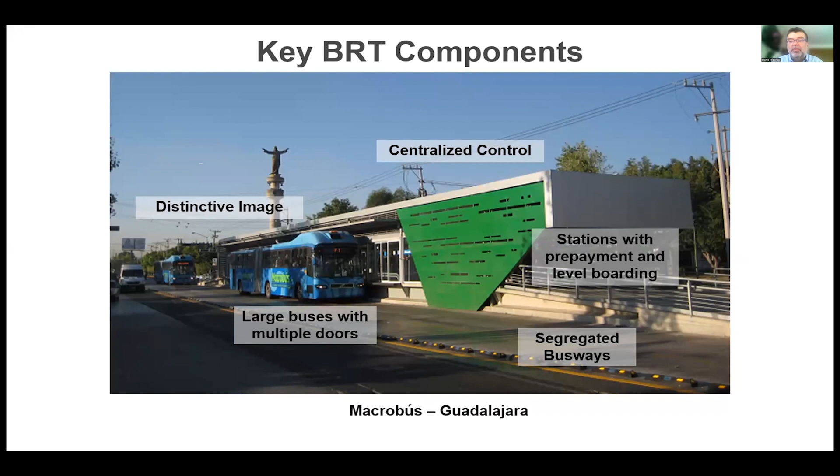Buses that are adequate to the capacity and the need of the system, stations. In most of the high capacity systems, you pay before boarding the buses, not in the bus, to reduce the dwell time, the time that the bus is at the station. Centralized control, that's very, very important to optimize the operation, and a distinctive image. When you have all these elements together, you have a full BRT, but you have a lot of flexibility to apply these concepts to different corridors in different parts of the world.

Currently, there are 187 cities moving more than 30 million passengers every day, almost 6,000 kilometers of BRT, and it is mostly concentrated in Latin America, where the systems started in the city of Curitiba. And we have examples in Asia, particularly in China, and in Australia. There are very important systems in Australia, but there are also systems in Europe and the US, which are part of the fabric of the cities and the integrated systems we need.

And actually, this was not part of mobility 25, 30 years ago. There were few bus corridors, one in France, then one in Lima, then Curitiba in southern Brazil, but there were very few systems as such in different parts of the world. And as with any technology, there was a slow and long time where the technology was not adopted by many cities. And suddenly, after Mayor Enrique Peñalosa put together the system in Bogota, many people got interested in this as part of mobility.

And there was a fast adoption, very, very fast adoption starting in 2001 up to 2014. And then there was a decline, not a decline, still several cities are adopting BRT, but not as fast as they did in the first decade of this millennium. And when I see this picture, I see something very similar that happened in the previous change of the century, and that was the adoption of trams. The adoption of trams got exactly the same shape.

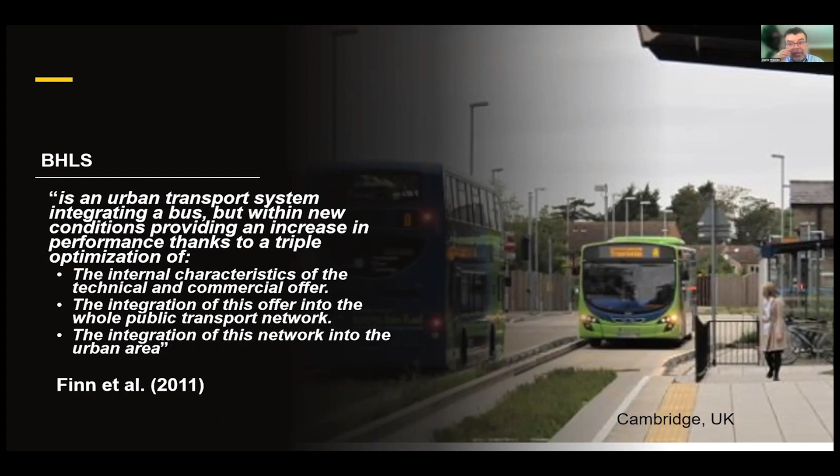These concepts were applied in many cities in Europe in the form of BHLS, and you see that in the end, the concept of BHLS is a very close cousin of the North American BRT, because the term BRT was coined in the US and then applied in many places of the world for systems that were already in place. Curitiba and Bogota were already in place when the term BRT came into massive use. But when you see Europe, the busway in Nantes, you see running ways, you see stations, you see vehicles, you see ITS and operation management tools, and a strong identity.

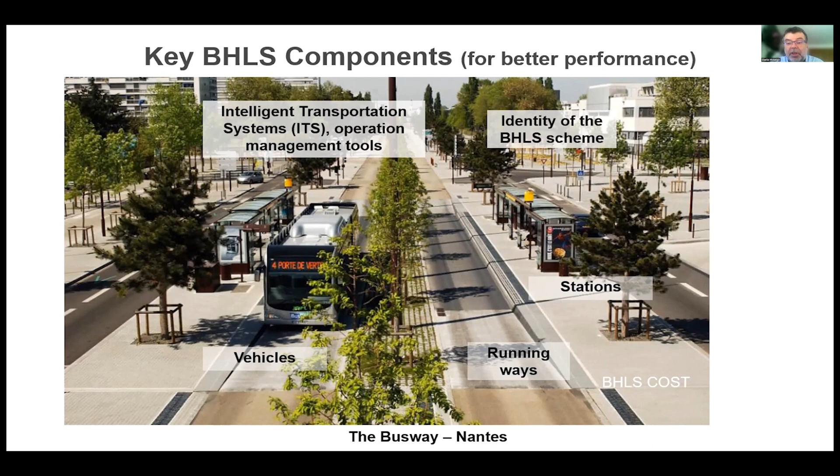So the BHLS is a very strong cousin, it's a very close cousin to BRT, but it's very adaptive and is focusing on performance and integration, which are two very good elements. And the report by Finn et al. and other reports have considered BRT innovative concepts that can be a part of the transportation system and also the backbone of public transport in medium and small cities. Probably big cities need heavy rail, but BRT and BHLS can be part of the overall transportation system, and in some cities will be the backbone of the system.

So there are many reports. Here are some of the ones that I picked up over these 25 years that I have been working on the topic. And the characteristics that are behind these many studies are better access to low-income communities, reductions in emissions, land value increases, which is a very important concept on how to improve cities, to increase the value of the land. If you protect against gentrification, it's okay, but many reports show that BRT can also increase land values and improve road safety, which is also a critical element in our cities.

So there's a very strong literature supporting BRT and BHLS. There are issues in implementation, there are debates and discussions, but it's part of the toolbox. The difficulties are always not on the technology itself, but on institutions, on finances, but also the misperception that buses are a low quality mode, which is wrong. Buses can be high quality if you design well, if you operate well, and if you provide the right characteristics of the system. And even though many reviews, some of which I have participated in actively, show that there have been planning, implementation, and operational issues, all of these issues are solvable, things that you can fix, not things that are impossible to face.

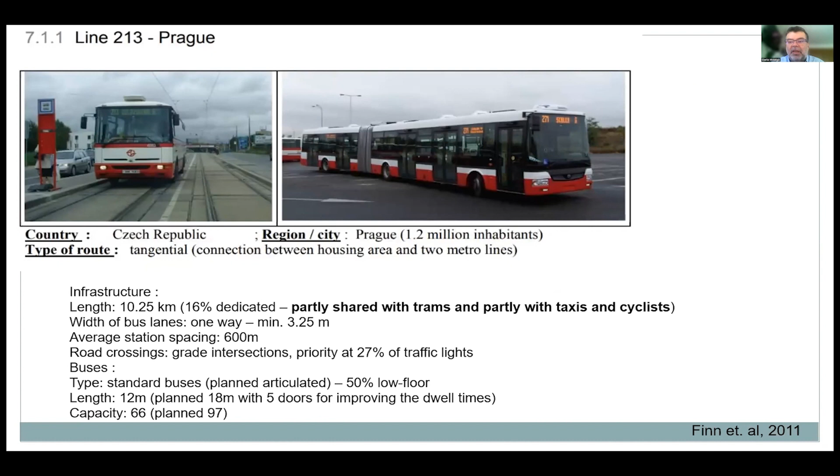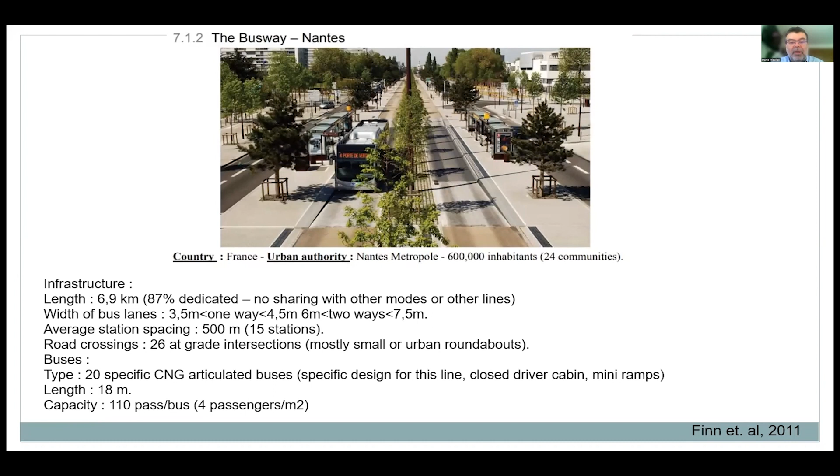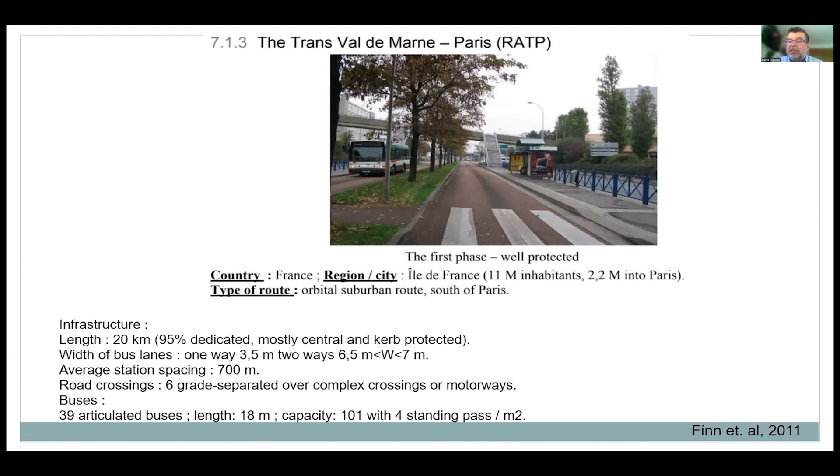The Nantes example is a very interesting corridor, not that long, it's only 6.9 kilometers, and it's very high capacity and has a very good integration to the urban realm. I really like this project. In Paris, there is a peripheral route that goes around Paris with buses that also help not getting the people in and out, because the buses come from other places, enter the busway, and continue at higher speed because they are away from traffic in Paris, which is a very excellent city with many things going on.

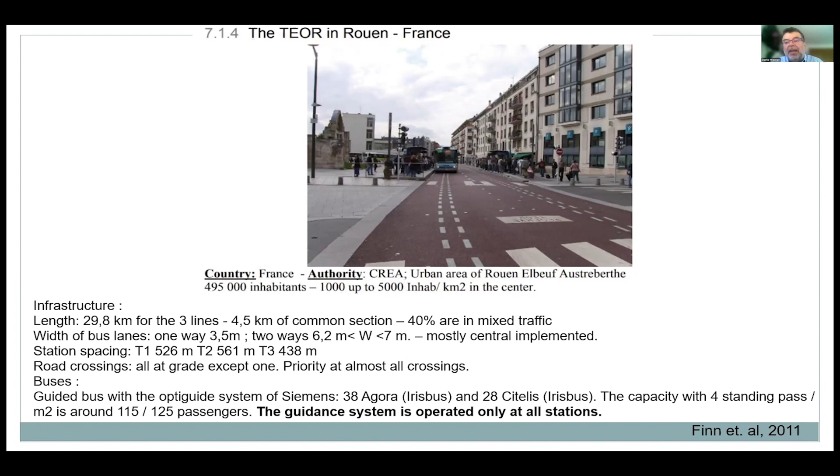There's another one in France, in Rouen. This one has guided buses that go really close to the station, so there is not a gap, and the guiding system works specifically at the stations, not all the way along the corridor. But the future of buses is automated buses. It's easier to automate a bus in a busway than automate a car in general traffic. So automation is coming also to these elements of BHLS and BRT.

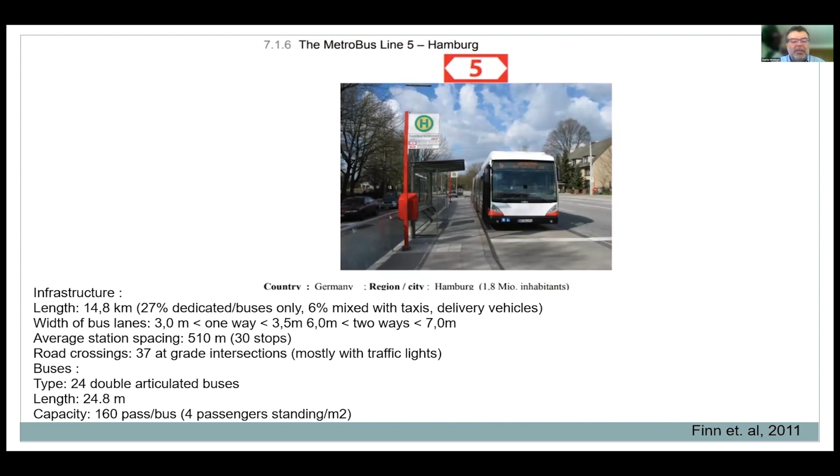This one in Lorient is very interesting because it doesn't have traffic lights and has a very special design. So the bus has priority without traffic lights, and it's faster for everybody in this place. In Hamburg, in Germany, you also see these elements, and you don't see a very special and spectacular design. It's actually simple. It's providing priority to the people that are going in the buses above the general traffic. Another example in Oberhausen, which has the combination of trams and buses. In Europe, they are not afraid of doing this combination.

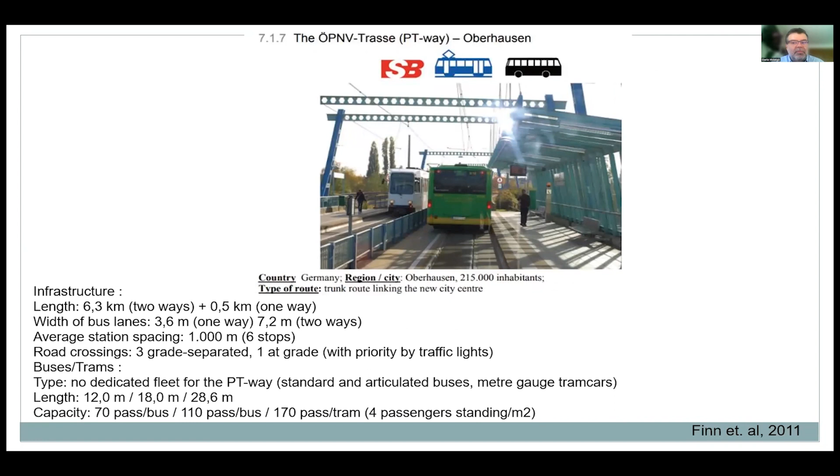There's no reason not to do it. And this one, there is a guided bus. This was an invention of the 70s in Essen. It was also applied in Adelaide in Australia and in Cambridge in the UK, having a little wheel on the lateral side of the bus that guides the bus at high speed in a totally dedicated lane, which is also grassy with greenery, and provides very high capacity and very fast commute to the users of this Spurbus in Essen.

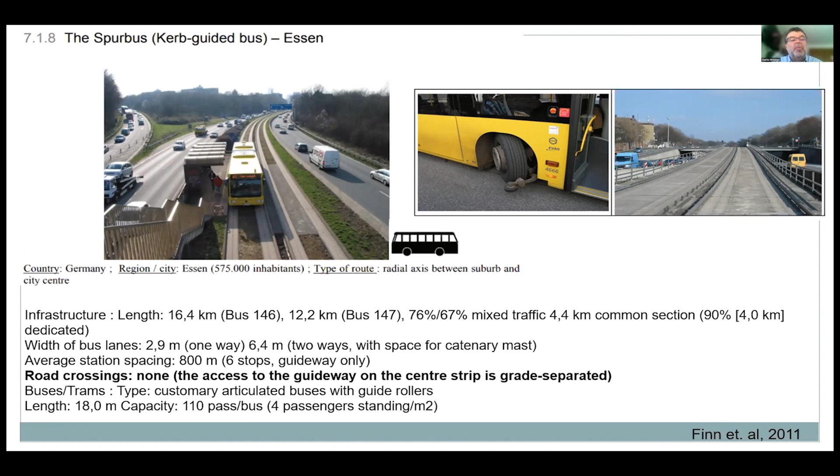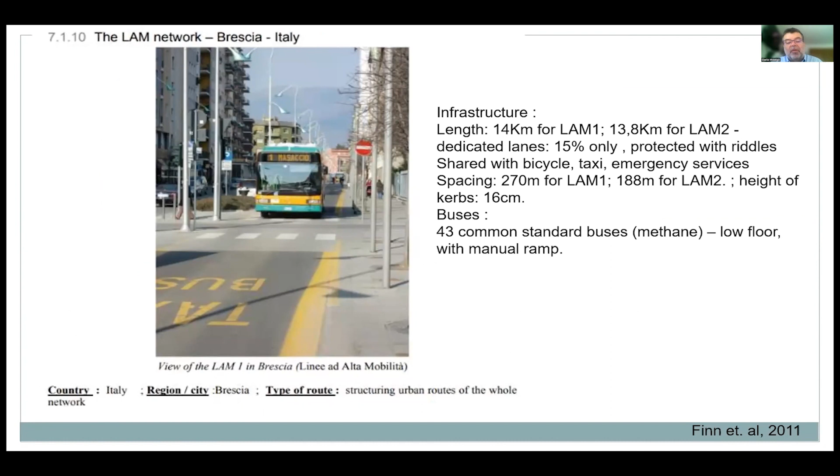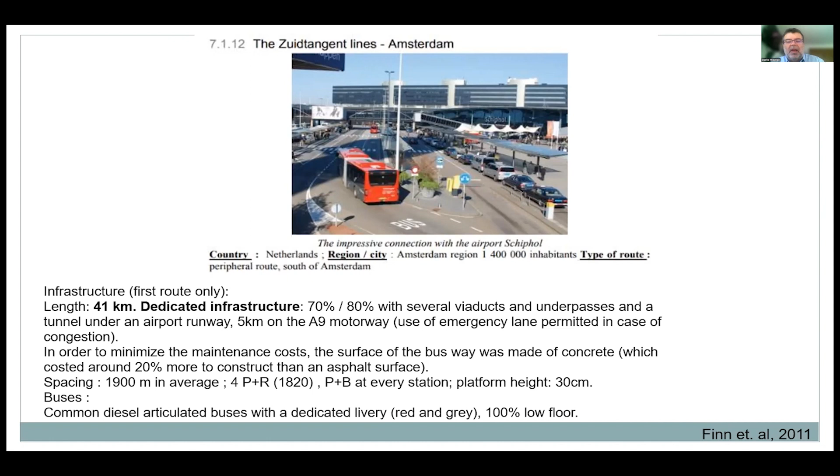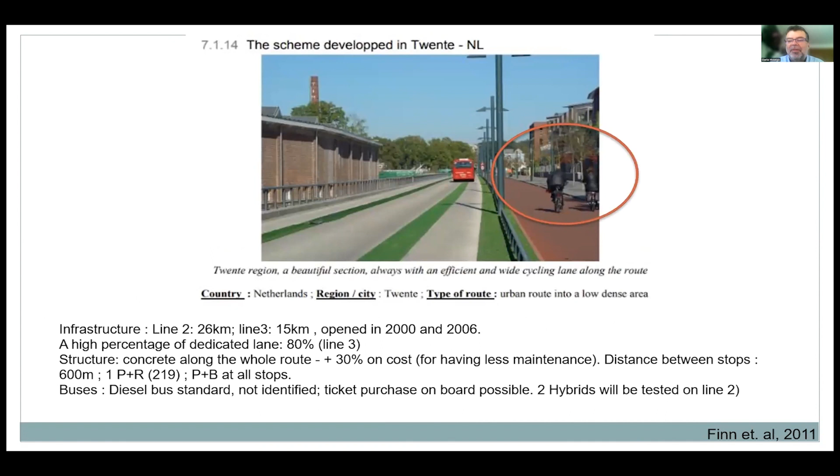There's also these buses in Brescia in Italy, which are also very, very interesting for the size of the city. And in Amsterdam, they had a really, really strong and connected network that goes all the way from the airport to many places in the city, 41 kilometers in a major European city. And there are other examples in the Netherlands, which always are combined with bicycles, because that's the Netherlands. You don't do just buses or trams, you also do bicycles.

And also in Lisbon, you see this in Spain with a guided trolley bus. You see in Gothenburg in Sweden, and also in Stockholm. And you also see in Zurich this very, very large bus that was designed especially for a BHLS route in Zurich. And in the UK, you see this Thameside, which is a new development that was developed also with the BHLS in place, and also the guided system in Cambridge. So these are examples from Europe, and you see a lot of flexibility.

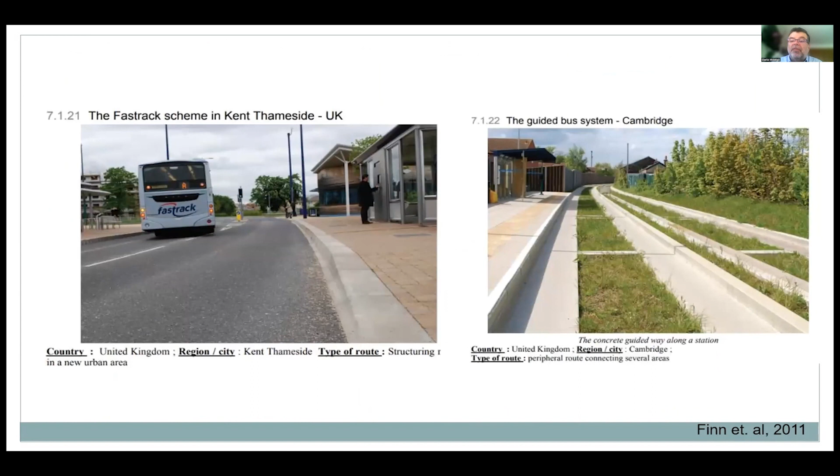But what about the US and Canada? In the US and Canada, there are 15 cities in the US, and the largest of them is New York City, with the Select Bus Service. Here in this series, Janette Sadik-Khan, who was the person behind all the transformation with Mayor Bloomberg in New York City. And in Canada, you have many systems that are really high usage. You have Ottawa, you have Winnipeg, and others that are lower capacity. Total of 7 cities listed in this database of BRT data that is maintained by WRI in Brazil.

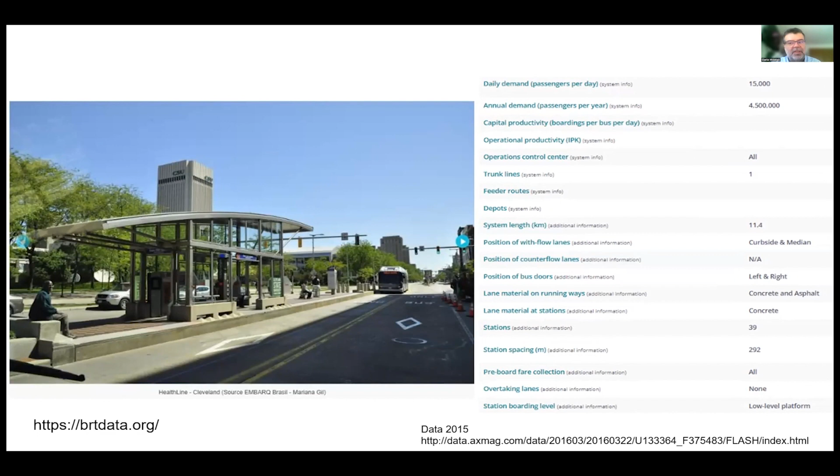So let's look at these examples. This is Albuquerque in New Mexico. It's a very interesting branding for it. It is called ART, A-R-T, which resonates very well. You have this one in Arlington, Virginia, close to Washington, D.C. It's a small route, but it's a very interesting integration into this part of the Washington, D.C. area. You have this Cleveland HealthLine. It's called HealthLine because there are many hospitals on the route. It's very high capacity for U.S. standards. It's a very nice system in Ohio.

And a system that is older is Eugene, Oregon. You see also this grassy route. You don't need to pave all the busway. You only need to pave where the wheels of the bus go, and you have very nice stations and shelters for Eugene, Oregon. It's a small city. There is another one in Fort Collins, Colorado, which uses the spare space along a rail track, but adapted very well for these buses that are called MAX.

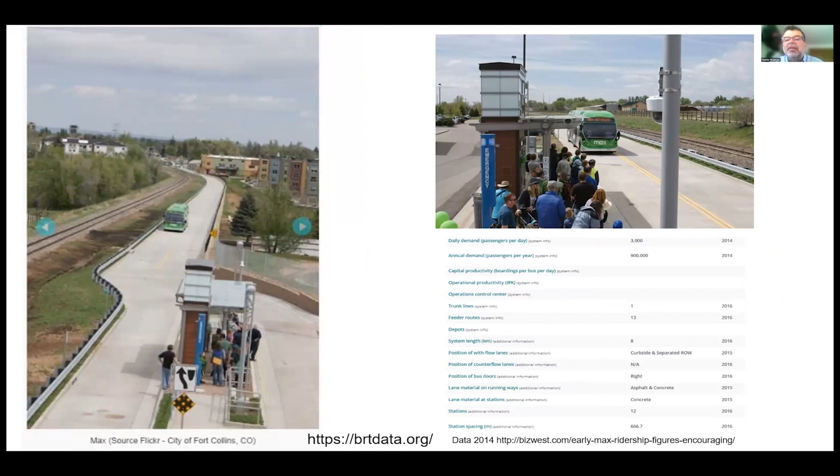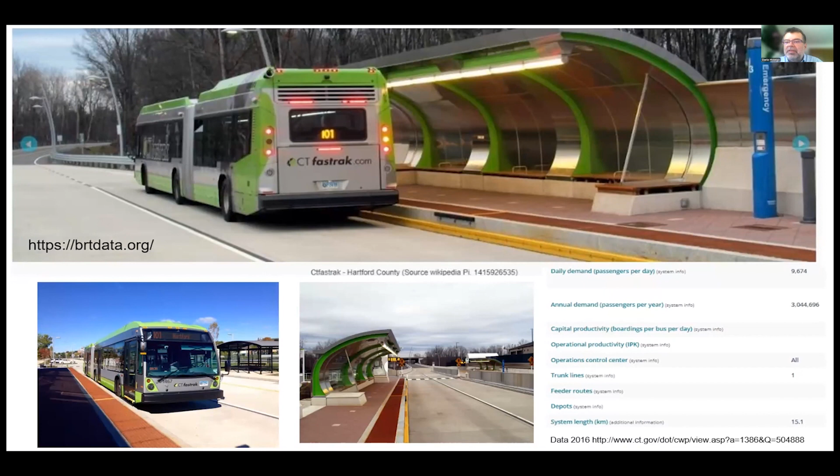And CTfastrak in Hartford County in Connecticut. Also the busways and the buses and all the characteristics in a combined system that provides higher capacity. In Vegas, where you can find anything, you can find also this BRT, which is a very, very well done system that even connects the mall with the older casinos, and it's not only used by locals, but also by many tourists in this city.

In Los Angeles, in California, they introduced these BRT routes, and it's actually an extended system for many corridors in LA, which has this adaptation of putting the bicycle in front of the bus, which is also a good way to combine long trips, combine your bike trip with a bus trip.

You have this Metrorail in Miami, also along a rail corridor. Some people in Miami say it doesn't work well and want to invest 10 times as much in something that will do mostly the same as the Metrorail is doing in Miami-Dade. A very, very extended system, very simple because it's just painted, red painted.

Hello, Dario, you just froze for a second. Hello, let's see if we get Dario back. Wow, this is very, very interesting. Dario, you are back. But you are muted. You hear me? Yeah, perfect. Thank you.

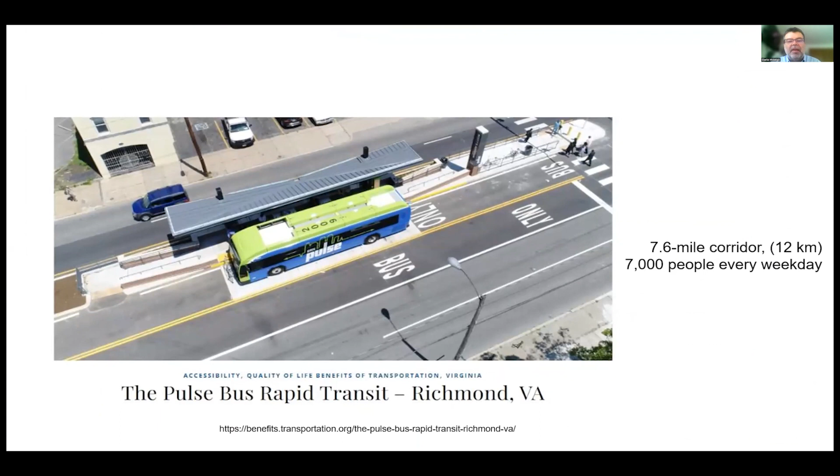An older system in the US is this one in Pittsburgh. It was one of the first implementations in North America. It is very high capacity and it's totally segregated. It doesn't cross with traffic. It's totally segregated, very similarly to the Transitway system in Ottawa. Also, this one in Richmond, Virginia, and this one in the city of San Bernardino.

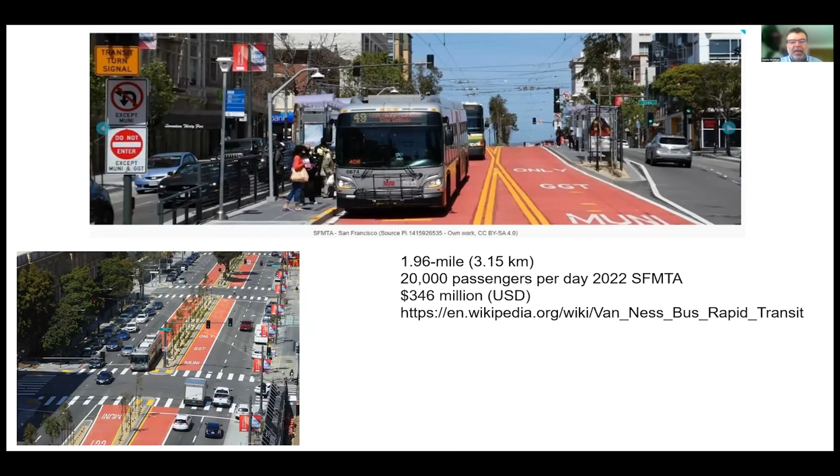And the last of the list is San Francisco in California. This is one of the two corridors in San Francisco. This is the Van Ness corridor. And now they have Market Street, which combines electric buses with normal buses. So you see that North America has been adapting these conditions of BHLS from Europe and BRT from Latin America.

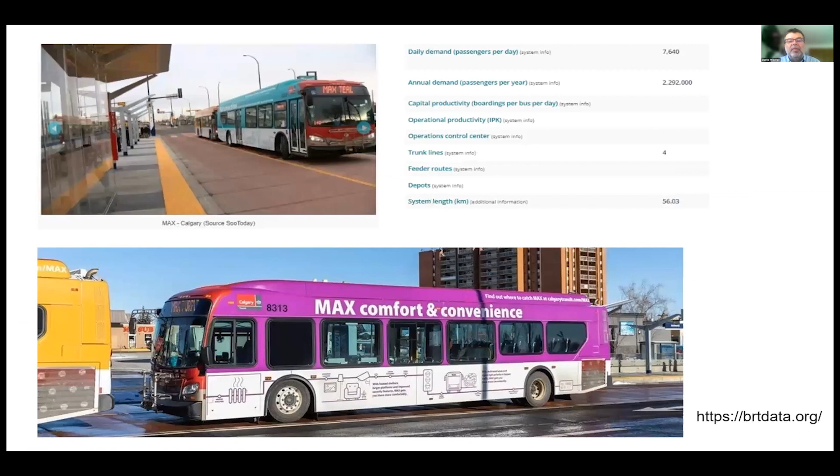And in Canada, you have 7 good examples that can be improved. Everything can be improved. The largest system is Ottawa, the Transitway, but you have this one in Calgary, MAX. You have this one in Gatineau. I didn't find the demand numbers, probably because it's in French. I didn't find the figures. Probably someone in the audience can provide us with numbers for Gatineau, which has a very particular way of design.

These systems in Canada are similar to the one in Adelaide in Australia. Probably the same group of people is designing them. They have these larger stations with good connections. This one is in Mississauga, and this one is in the Toronto area, and in Quebec is a larger system. Actually, it has been expanded over the whole city, and probably this one in Winnipeg, which is very short but very high usage.

Actually, the one in Winnipeg, and the audience can help us, it's buses that come from many places and then join and go in the busway. So it's very, very high usage, more than 166,000 passengers every day. And the one that I reported at the beginning of my talk, the one in York, which is very well done, and it's integrated with the fast, rapid development of this region in the metropolitan area of Toronto.

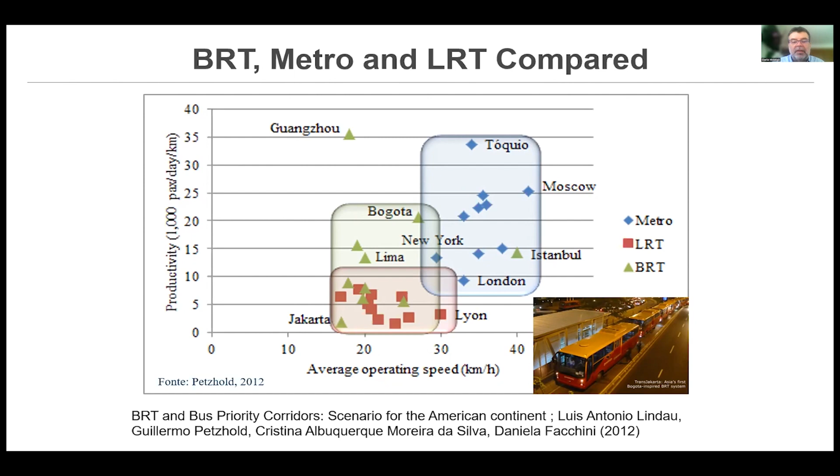So the current status, we have 187 cities and counting worldwide. There's a new system that is not yet reported, in a new corridor in Montreal, and that was reported by Taras Grescoe, the Straphanger. It's very interesting. There are these types of applications, BHLS in Europe and BRT in Latin America, adapted to the conditions of each city. The innovations continue, especially automation; probably low emission vehicles or zero tailpipe emission vehicles and automation are the next steps in buses.

We have high performance, low cost, and rapid implementation, which is something that is very important for mayors. You can put together a corridor in very little time, 3, 4 years in our context here in Latin America, probably a little bit longer because of all the things you need to comply with in the US and Canada, but it's faster than many other alternatives and lower cost. The trend is going from corridors to integrated networks, and some issues on reliability, occupancy, and acceptance are still outstanding, and we need to continue promoting the high quality to get more acceptance. Because the bus systems are usually perceived as low quality and poor systems for poor cities. And actually, I don't agree with those statements.